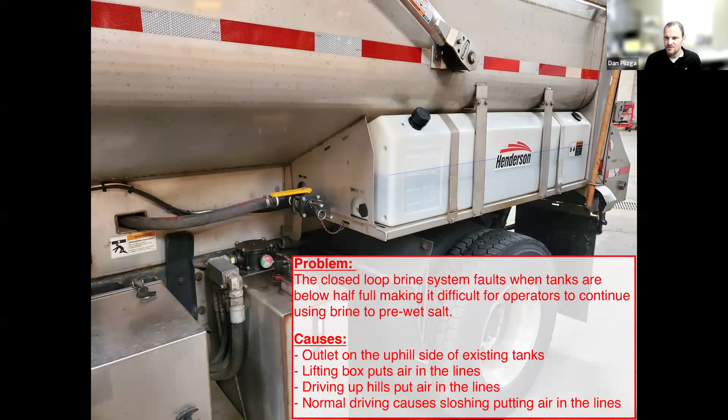And the solutions we came up with for that, if you want to go to the next slide. So we identified a couple possible solutions. One is we could change where the tanks are located. As you can see, it's not ideal having the suction on the front of the tank, but with how they're placed it'd be difficult to change that.

We talked about possibly adding ballast to the tanks to reduce the sloshing, but the opening isn't very big, so it'd be hard to get ballast balls in there. So the solution we came up with was to add this nurse tank.

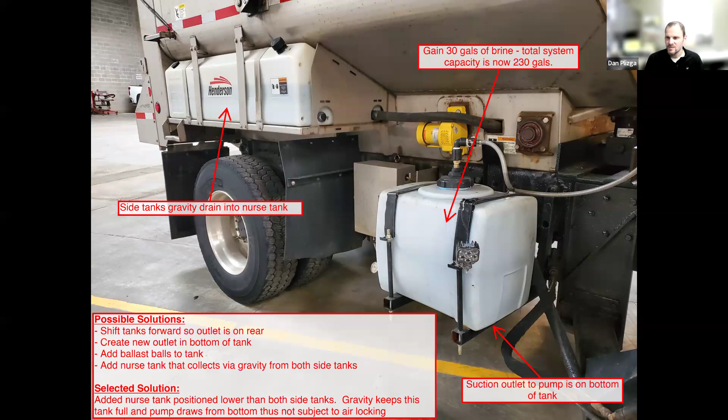So it's mounted lower than both of the saddle tanks on the sides. And what basically happens is the main truck tanks gravity drain into this lower tank, and then the pump suction draws from the bottom of this tank. So you basically never are subject to air in the system because this tank always stays full until the side tanks are completely empty. And if you go to the next slide, you can see kind of looking up at the bottom of the tank what that would look like.

And another benefit is it gave us an additional 30 gallons of brine, so we're up to 230 gallons per truck. So kind of an added side benefit.

And we basically implemented this on all of our new trucks. Now our vendor actually adds this as a standard installation during building the trucks now. So it's worked out great.

Yeah, and so answering the question of why enter the mousetrap: it's always cool to see all the ideas that everybody has. We're all kind of trying to solve the same problems. And so even if it's something super simple that you've created in your shop, or maybe you think you just cobbled something together, it's things that other agencies are likely trying to solve. So I'd encourage anybody to enter the competition, and it's always really fun to see all the entries and ideas that people have come up with. And especially with that OPERA funding, even if it's just an idea that you want to try, you could apply to get funding for it and then build it and then enter the mousetrap. So it's a great program.

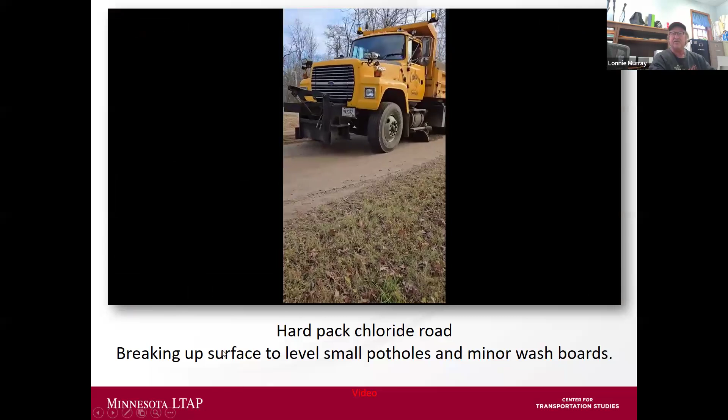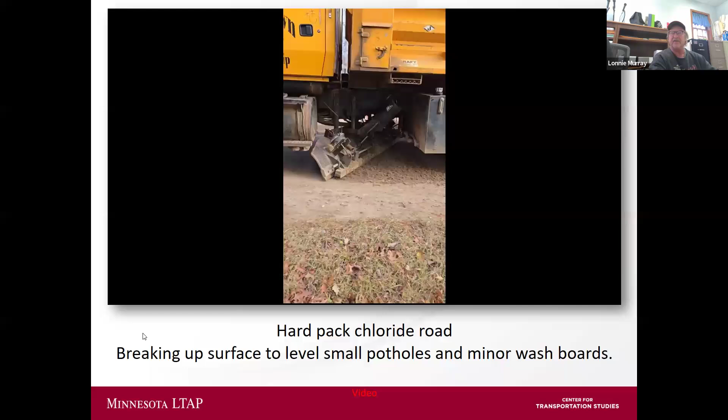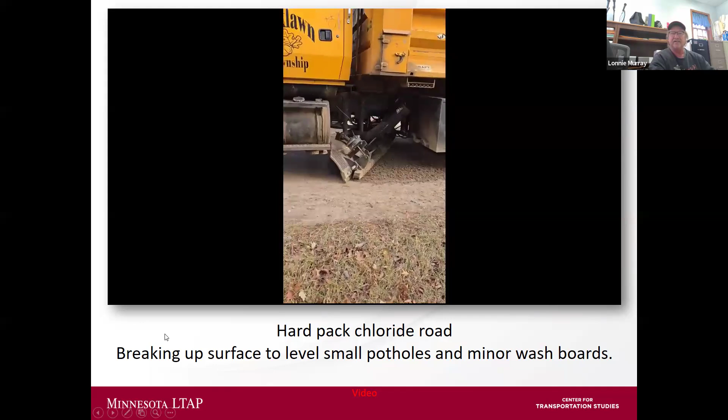After making this thing, I used it continually, even in the summer before it froze. I grade roads with this continually, saving a lot of hours on our grader, especially on chlorided roads where you don't want to use the grader and destroy the chloride. It takes out small imperfections, a lot by stop signs where the acceleration points are and you get small washboards and potholes. It saves a lot of hours running a grader around for just little spots here and there, or where a four-wheeler's throttle accidentally got stuck. Everybody sees that it works great - you don't have to run a grader out.

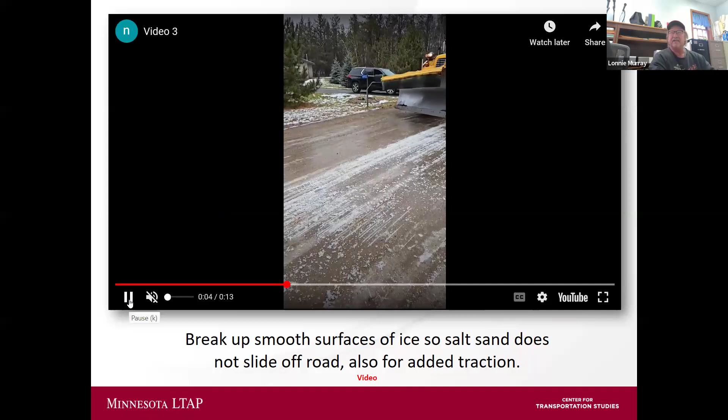Now slide 2. It seems the norm the last few years is rain in December. The gravel roads this year were just frozen, and it rained and fogged, and this brought the gravel back to the top and destroyed the ice, giving everybody traction without using any sand or salt on any of our gravel roads. For 15 miles, I ran this on both sides and didn't use any salt or sand on any of the roads.

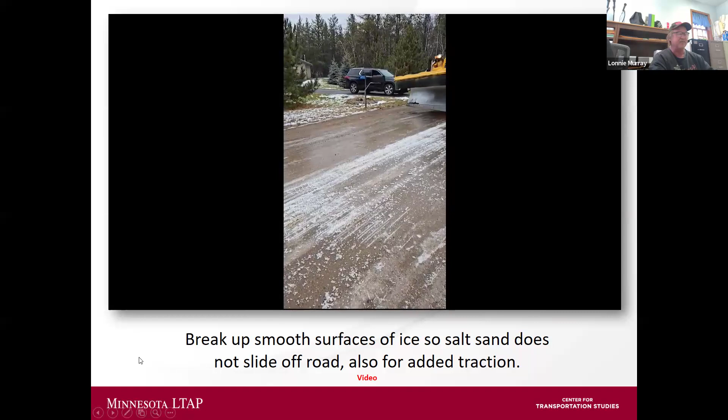One thing to note, though, is that you don't want to do this on tar. But the salt and sand worked great on the tar.

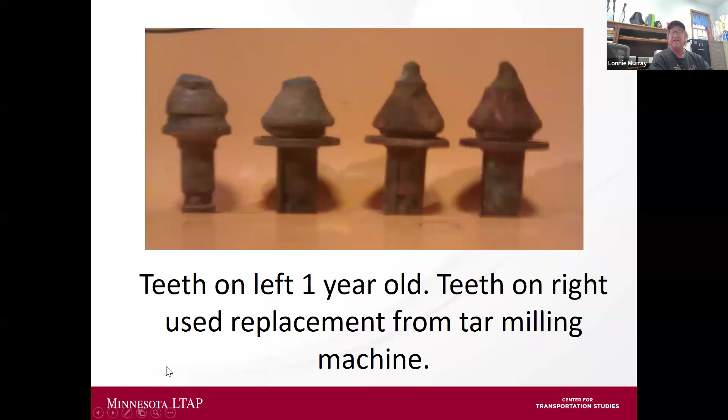Now we're on to slide 4. These are the so-called new ones that we're putting in, as shown on the bench.

So we're on to 5. I found out that we had to add these angle iron bars on each side to hang onto the washer. Without those, when you're just using the belly blade, it will shake violently enough to throw them out. So we had to add a kind of lock, which ended up being a real cheap fix, and never lost one after that.

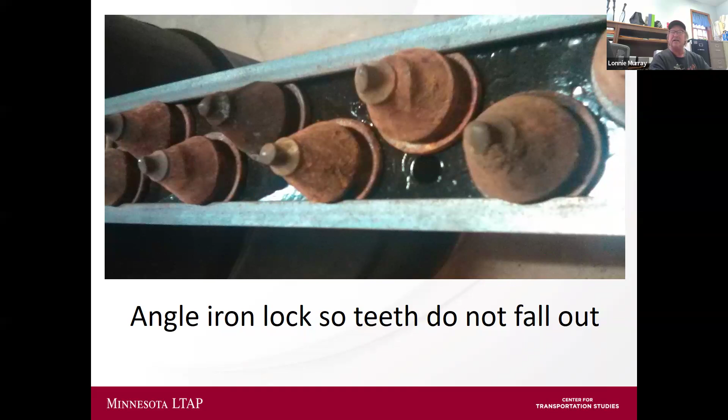Number 6, this is a shim that goes underneath the hinge to adjust the depth of penetration, since the belly blade is the guide for the depth that the teeth will ride. In the winter, I run the teeth only about 3/8 of an inch for penetrating the ice, but in the summer I run the teeth about a 1/2 inch for grading.

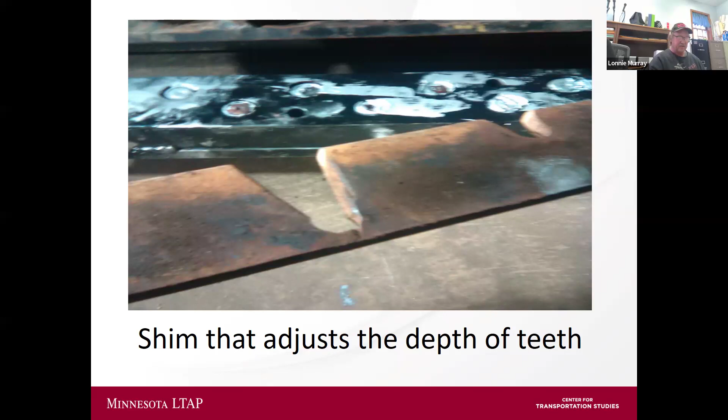So number 7, here's just another picture of the shim going underneath the hinge for controlling the depth.

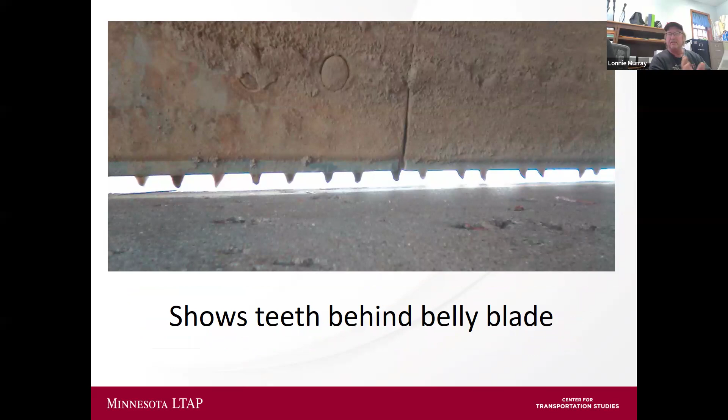Number 8 shows a picture of what the teeth would look like from the belly blade side. Number 9 shows a back side picture of the teeth with the bar down - this is on concrete in front of the town hall, and it's holding the belly blade up with the teeth pushed down.

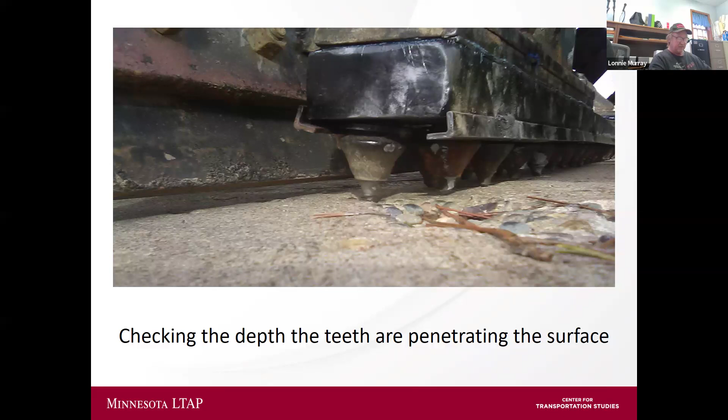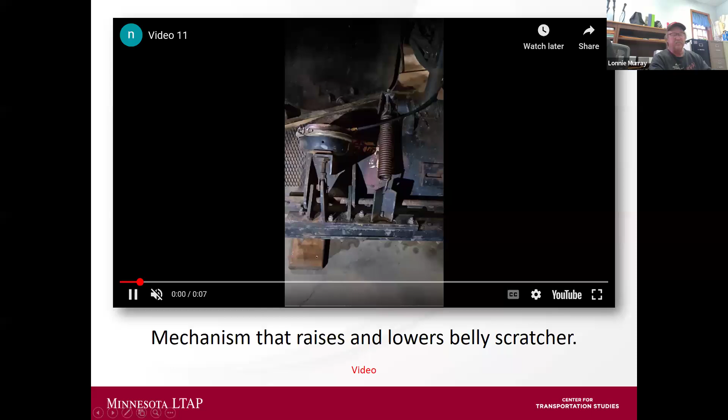So number 10, this is a short video, and I used brake chambers as the actuator to raise and lower the bar, so that it's up out of the way and never touches the ground when you're just using the belly blade.

And then the last video is just back on the grading on the road.

It's amazing how many hours I've put on that thing now. It's like your favorite screwdriver in your toolbox, you can't live without it. When you're out on the road, graveling or doing other work, and there's a spot where it's a little torn up by somebody's driveway or whatever, you erase it and keep right on working. It's amazing how much we use that thing.

It's turned out to be a wonder. That's kind of the short of what I dreamed up while driving around in the truck.

Thank you so much for sharing, Lonnie. As we move into the Q&A, I have a question for you: how did you hear about the Mousetrap program and how did you decide to enter?

Well, I've seen it in the pamphlets that get mailed out, and we kind of just entered it on a whim, like, let's just send a picture in. It's been kind of a ride since then. Didn't expect all this publicity, but I guess it's been kind of fun.